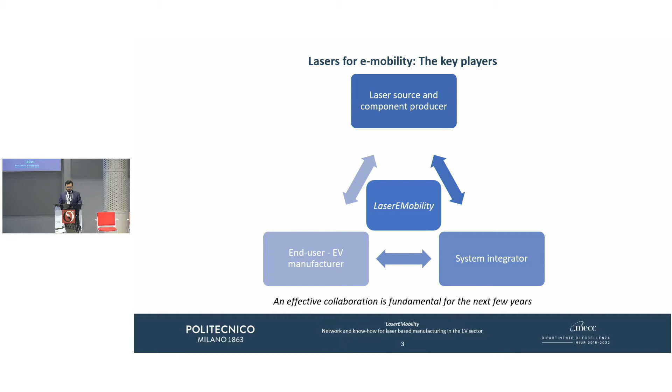In Europe and also the energy storage system, Laser E-Mobility has the humble aim to sit in front of all of these players, be the one that creates the network, facilitates the communication, so that we can have the right way of collaborating. So Laser E-Mobility is the name of our workshop, but I would like to remind us that Laser E-Mobility is a network of universities and companies. We call this a section under AITeM, the Italian Association of Manufacturing.

It was founded by 3 academic and 3 industrial partners. I'm grateful to my colleagues from Bologna, from Munich, and from the industry we have IMA Automation, Atop, Manz and Relays, who represent some significant companies in the e-mobility sector. So the idea is this: we're a group of universities and companies, and we would like to expand, because I've been speaking to some of you here present, and the question was, can we be a part of it, or how did this thing start, and what's happening? So I'm speaking to you as the scientific responsible of Laser E-Mobility, and the idea would be to start collaborating and networking.

You have heard of these things probably so many times. The question is, what do we do, and what is the benefit, or what are the things that we can do within this network? Some very simple proposals and some open questions that we can discuss throughout the workshop, afterwards, and so on.

I have been speaking to people, and one of the questions was regarding the fact that we wanted to share knowledge, and we need data. We need to show people how things work. So one proposal: an atlas of laser mobility applications from the emerging ones - application, solution, quality metrics, measurement outputs. Shall we do this? Do we want to contribute to this? A series of applications given in simple documents so that we can share it with the world.

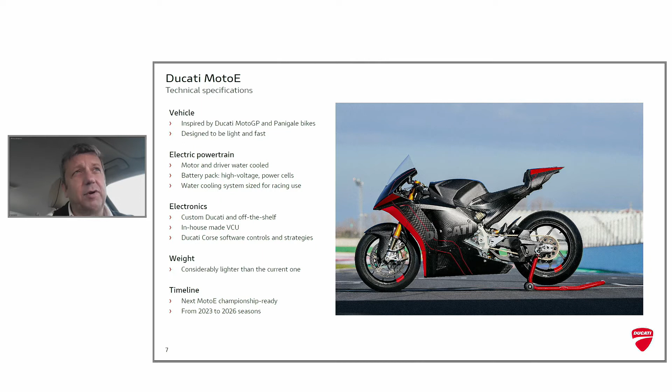The idea is to provide all the teams with this motorcycle for 4 years, starting from 2023, next year.

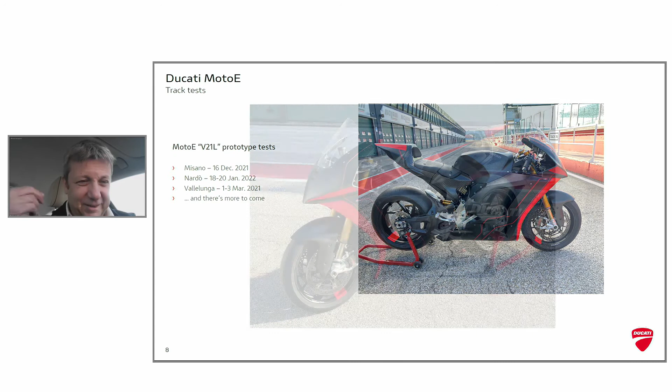Here I took some pictures of the motorcycle that we tested in Misano last year, and also we had a couple of tests at the beginning of this year, and now we are here at the racetrack of Mugello for a test with our test rider Michele Pirro. Okay, this is another picture.

Very quickly also on the MotoE itself, how it is made. As I mentioned, it's a racing motorcycle, made especially of aluminum machined parts or casted parts, but with the idea to reduce as much as possible the weight, because this is also an important issue, especially for electric motorcycles. All battery pack, seat support, and fairings are made of carbon fiber.

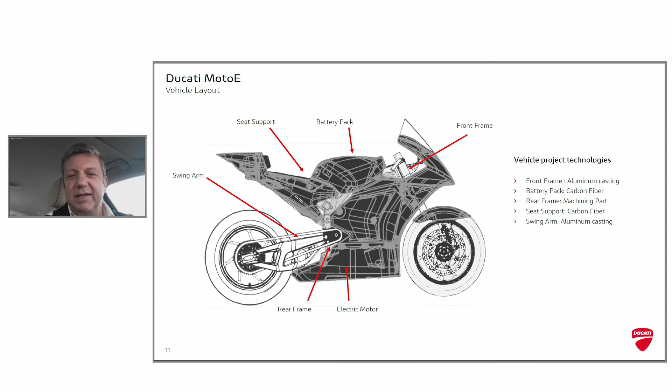This is probably the most interesting point for this workshop, because we struggle not only for the weight of the motorcycle itself with carbon fiber or other lightweight parts, but we had to concentrate also on the performance of the motorcycle. That means we had to gather the best efficiency on both aspects, resistance and cooling of the battery pack.

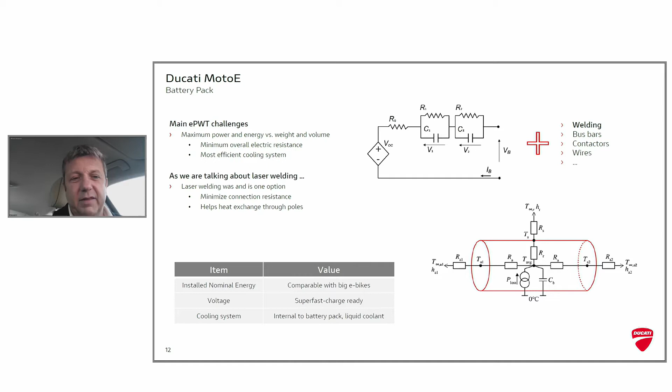I'm showing the electric equivalent model of a cell. But there is not only the internal resistance of the cell that, of course, we have to reduce as much as possible, choosing the best cell, but there are other aspects to keep in mind, especially the resistance of the connection. And here, laser welding can be interesting, but not only for the electric connection that has to be the best possible. Also, the thermal resistance is another point very important for performance vehicles. So we have to cool the cells as much as we can, because when we request a lot of current to the battery pack, they get hot. Also, in my opinion, laser welding can be an interesting solution to help the heat sink from the poles of the battery.

Having said that, let me spend a few words, but especially reason with you about electrification for Ducati, I mean for high-end motorcycles.

Ducati is involved in electrification and invests also in research, and has a very tight collaboration with the University of Bologna. This Moto Student project is only one aspect, but it's an important aspect of this collaboration, and we are quite proud of the job made by the students. They achieved first place during the last Moto Student competition. I have to congratulate them, because they are working very, very well, and they are a source of very interesting ideas. Personally, I like a lot the collaboration we have with them.

Next slide, please. Here you can understand what I mean. If we compare the energy of gasoline, I took an example of 10 kilograms, which could be equivalent to a 13-14 liter tank. You have to add another 150 kilograms of weight to get exactly the same energy from a battery.

That means that if you compare a racing motorcycle powered by an endothermic motor versus an electric one, there is no way, with the technology we have now, to get the same performance in terms of weight. For cars, maybe it's a little different because they have 4 wheels, but for a 2-wheeler vehicle, weight is very, very important. It's the most important parameter of a 2-wheels vehicle.

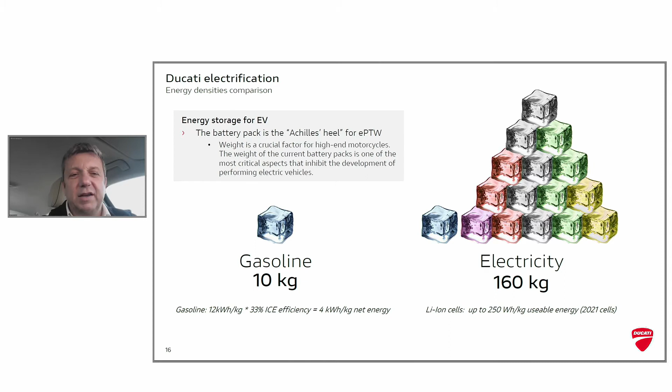Next slide. But Ducati has a vision, and the vision is to be the most desirable brand for power 2-wheeler products. I added also to this statement from Ducati: whether it's with an endothermic motor, thermal motor, or electric vehicle - this is our goal.

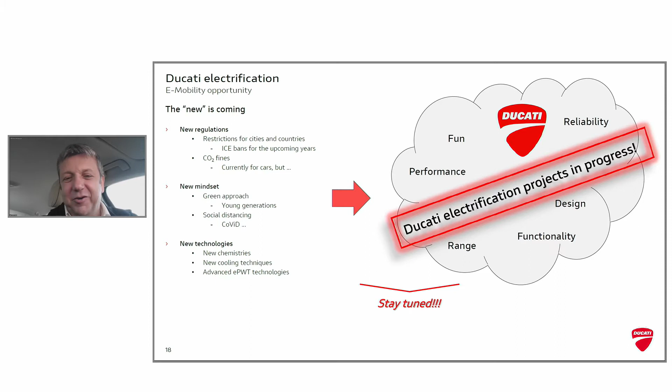So next slide, please. The idea is, and this is also my task, to exploit new technologies, new ideas, new chemistries, new technologies also in welding, power, heat sinking, and so on. And why not take into account that new regulation and new mindsets are going through electrification, to start to think and find something very new that is in the DNA of Ducati, to provide a very interesting electric vehicle. So stay tuned. Next slide, please, and thank you so much.

Thank you very much, Roberto. And thank you. I don't know if you can stay with us for a minute to see if we have any questions. I'm turning to the audience if we have any questions towards Ducati's electrification challenges that we have seen so far. If not - apparently we have a question. Roberto, you can't see, but we have people. Yeah, I see some of them.

So thank you for the very interesting speech. I just wanted to ask if, beyond laser welding, you have other laser-based processes that you're currently employing for the manufacturing of your vehicles, be it either endothermic or electric vehicles. Thank you. You're welcome, it's not easy for me to answer. I guess yes, not in particular for this racing motorcycle, but I heard from colleagues that we are using, for example, laser-cut parts for special parts, but I cannot be so precise, I'm sorry.

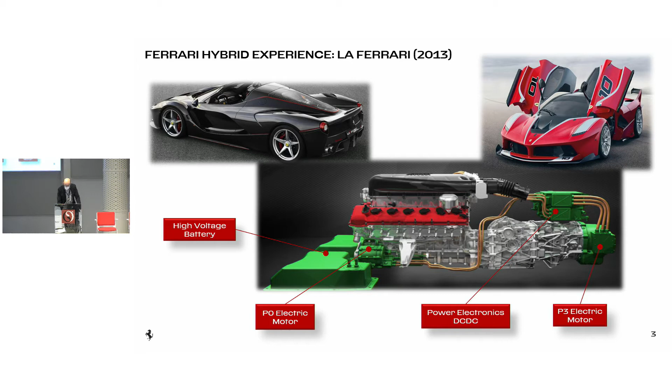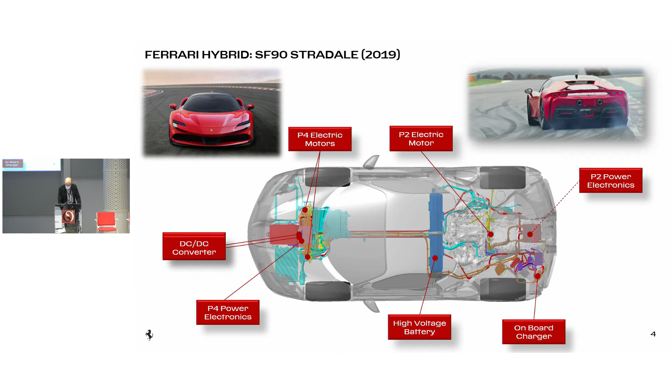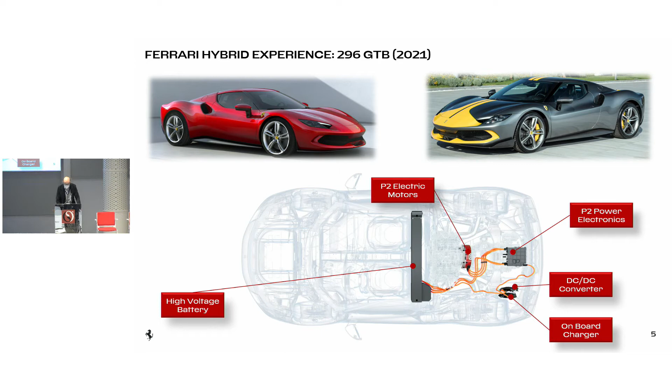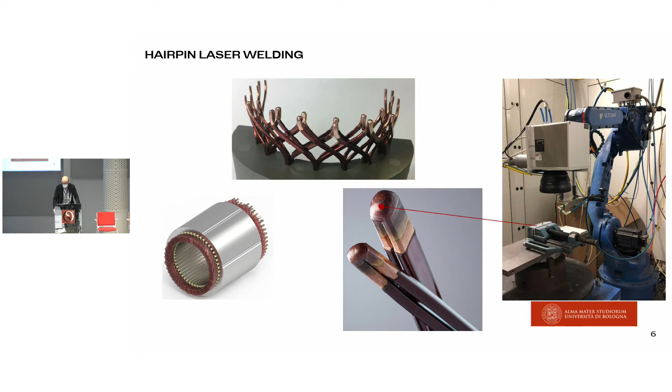To develop all the electric machines and electric motors inside this type of car, Ferrari developed, with the help of Università di Bologna, the technology for welding the hairpin with high reliability of this process. We start from the geometry of the hairpin, giving the right shape, finding out the right laser welding process in terms of parameters and type of laser, to have the correct welding process, but also the right time cycle on the production.

Now I give you an example of what has been developed with the university. We tried different welding patterns during the welding of the hairpin. For example, the wobbling with a single shift, so only one shift with the wobbling. On the other side, we also tried the linear rectangular pattern or the circular one.

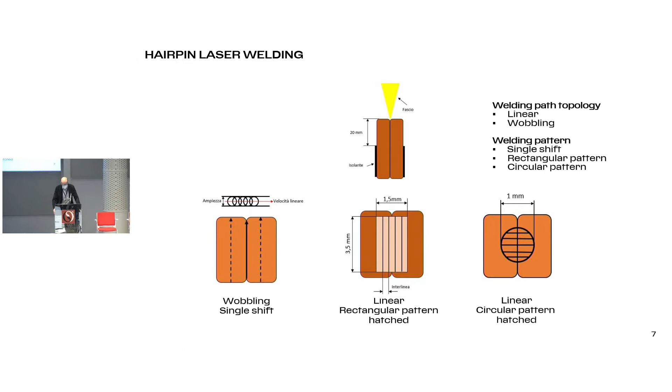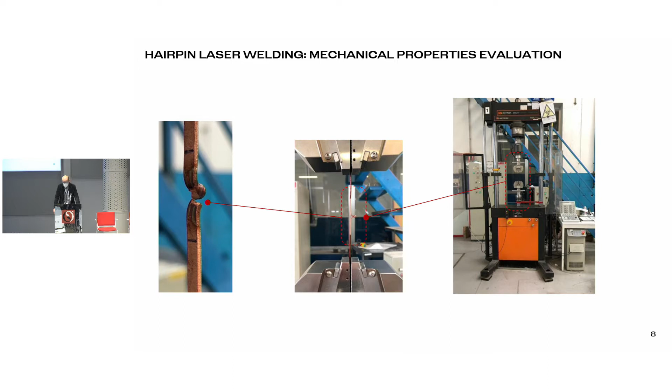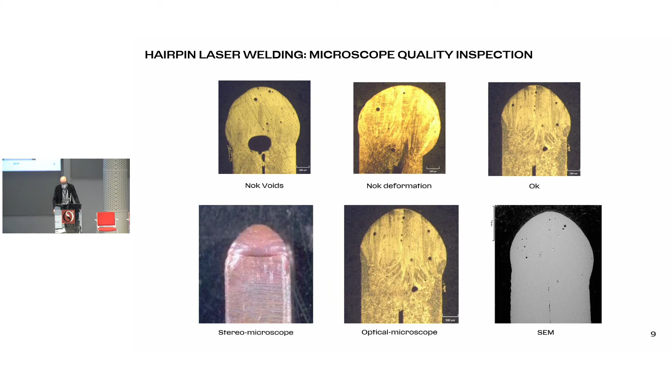This is not the only application of the laser welding inside our car. There is also the battery. This is just an example of the long activity that Ferrari has with the University of Bologna to find out the correct way to weld the tab of the pouch cell of our high voltage battery.

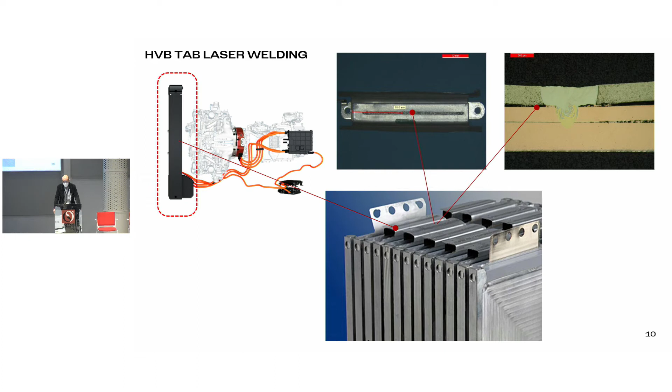From our experience, the laser welding is typically the fastest way to weld the hairpin, to weld the tab of the battery, because the process is highly repeatable, and with other processes typically it's quite difficult. Also, there is no contact between the welding tool and the part to be welded. And in an electric machine, this is really important because typically there is no space for the tool, so the only way is to have a technology where no tool gets in contact.

One of the targets is to reduce the thermal modification of the components that have been welded together, because when we move to the high voltage components, the clearance and the creepage distance is very, very small, and we need to keep the enamel and all the other components necessary for the electrical insulation without any damage.

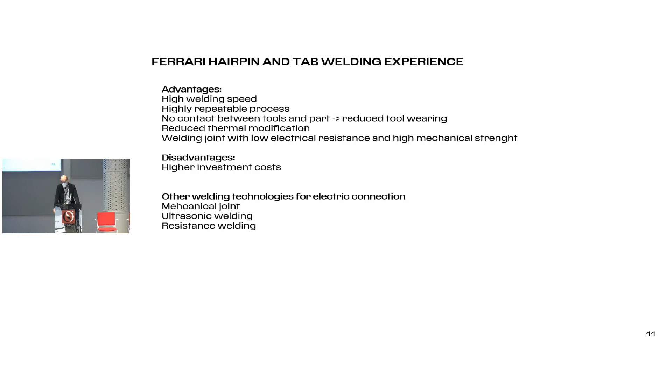We see that Ferrari wants to keep production of critical components in-house. So the electric motor, although it is a new concept and brings new manufacturing techniques, it's in-house. This underlines the fact that this is a crucial aspect of the originality of the vehicle itself. With this small transition, I would like to see if we have any questions from the audience or online. I don't see any questions yet, but let's see. Any questions so far?

Thank you very much for your interesting talk and the insight into Ferrari. You were showing that you're using pouch cells for the build-up of the battery modules. Have you ever thought about using prismatic cells or cylindrical cells?

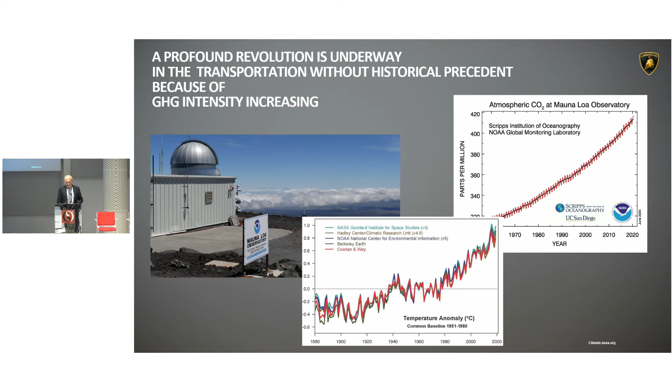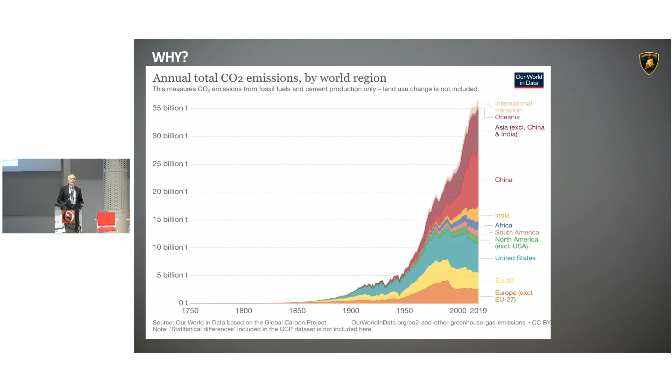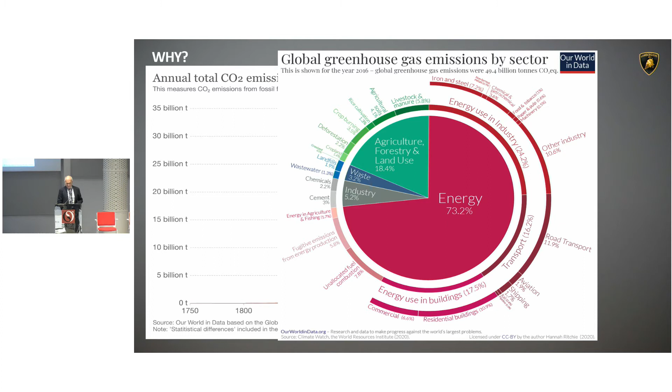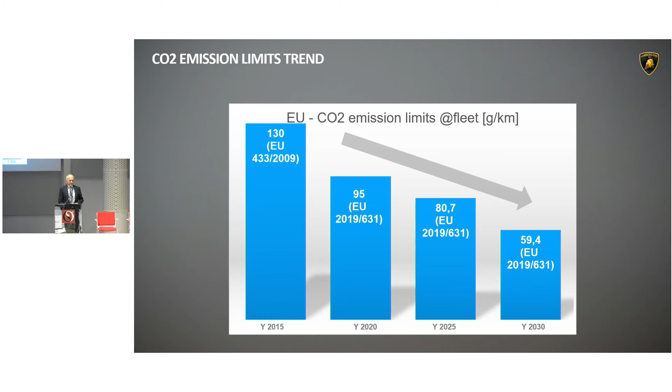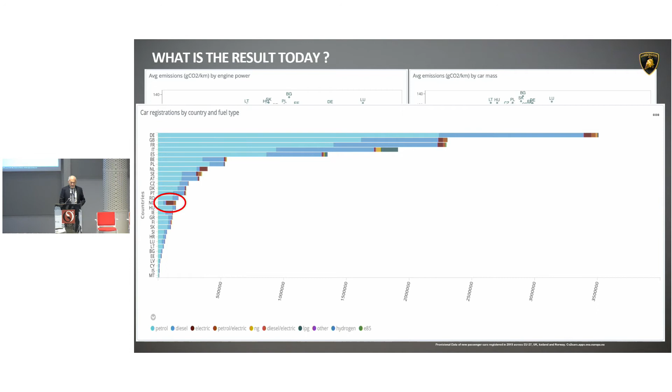But we are looking in this moment, or at least we are seeing only the tailpipe emission. If we look at the mix of electric energy in Norway, we see that it is created with renewable and storable sources. So they have hydropower. 96% of the quantity of electric energy in Norway was produced with hydropower.

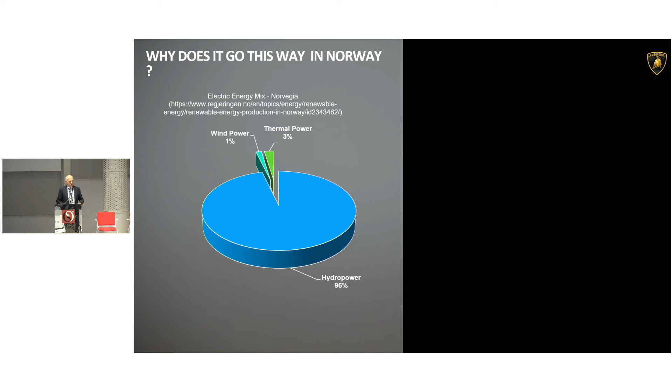If we look also at the mix of whole energy, not only electric, but whole energy produced in Norway, we see that more or less 50% doesn't emit, or is neutral to CO2 in the production. So it seems that the electrification gives a positive contribution to reduce CO2, because the electricity created is, let's say, neutral to CO2.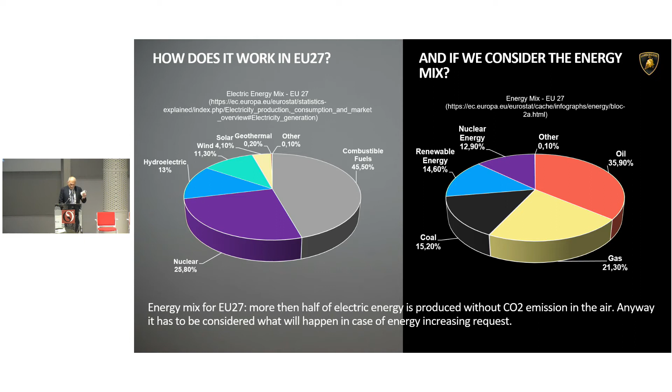Okay, this is something to consider. So legislation and environment considerations, with a critical approach to the resources of electrification, are anyway saying that we have to go to electrify the vehicle.

But what does it mean to electrify a vehicle? We started today, we spoke a lot about battery, so we start from the core, and the core is the battery. Here you see a battery of 55 kilowatt hours, medium energy, let's say - if I remember, it is the Zoe battery. With this battery you can drive 250 on the test cycle, maybe 300 kilometers, and the energy package weighs 325 kilo.

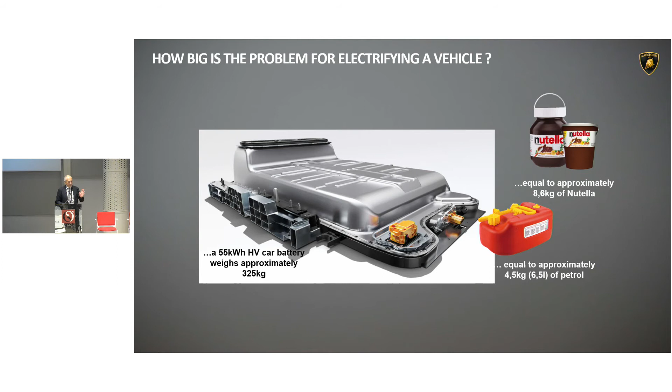325 kilo with 55 kilowatt hours is more or less equivalent to 4.5 kilo of petrol - the same energy in both these packages, or boxes. Just to give some sensitivity to everybody, it means there is energy equivalent to 8.6 kilo of Nutella, the same quantity of energy, but 325 kilo. Just a historical information: the famous Fiat 500 was 475 kilo.

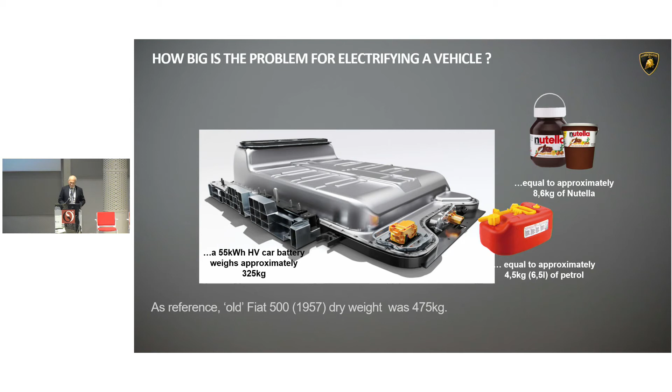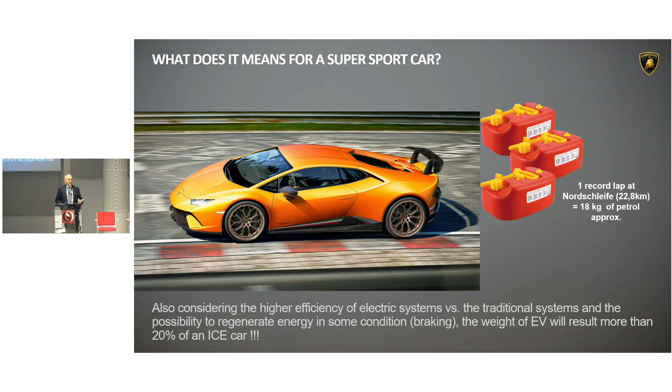So if we're looking at a super sport car, and we want to run a record lap at the Nordschleife, which is a reference for all super sport cars, we need 18 kilo of petrol, more or less 3 times what we saw before. So you can imagine if we have to transform this into electric energy stored on the car, it means more or less an increase of weight of the car of 20%. 20%, also thinking about recuperation, about efficiency, and of course all electrified devices are more efficient than electromechanical ones. But anyway, weight is becoming the challenge for the next generation of cars, and also today it is anyway a challenge.

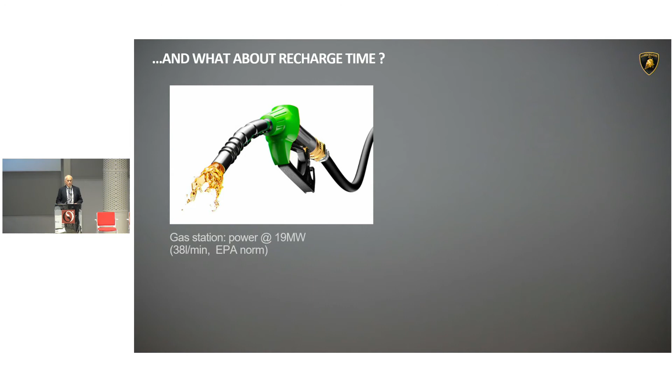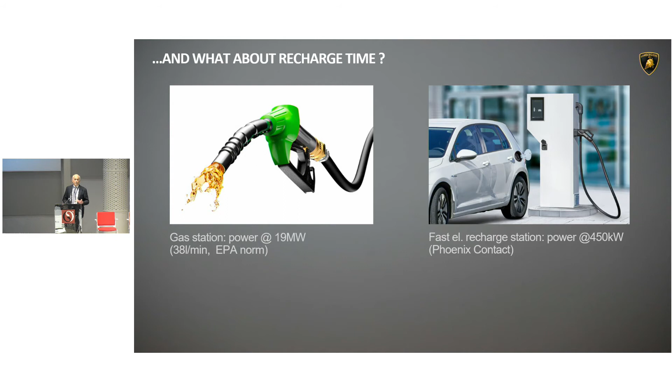There is also a short overview about another topic for all cars, but I think also for the super sport car it is a topic because it is correlated to the critical way to recharge. A gas station, a petrol station, has a power installed of more or less around 20 megawatts, when a fast electric rechargeable station has more or less 450 kilowatts. So the dimension of the problem for e-mobility in general, but in particular for a car that needs a lot of energy and a lot of power, you can imagine how big it is today.

The weight for the super sport car, it is the real challenge. To have and to be ready for the future, it is clear that we have to rethink how we are distributing the weight, and we have to take into account that anyway the electrification gives some flexibility, or more flexibility respect to the traditional powertrain, because there is a connection of wiring in some cases. So we can put some actuators, the electric motor, we can put the battery more or less where we want.

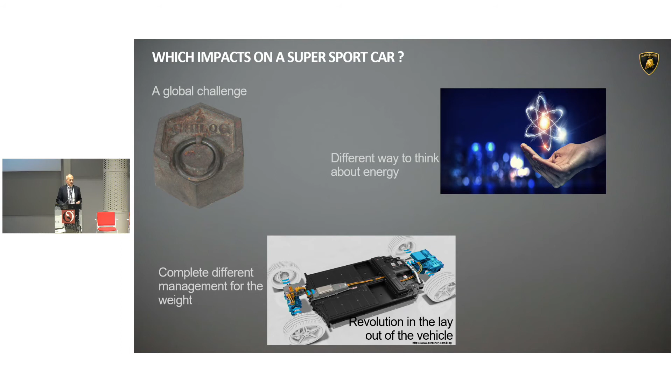But also, it is necessary also to think how to manage the energy in the car. Manage means how to recharge, how to discharge, and how to keep on board the energy.

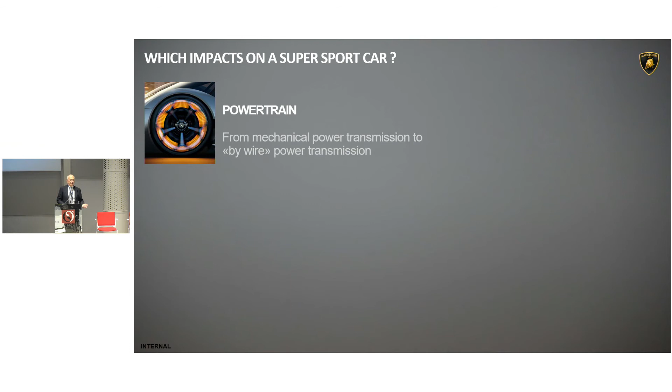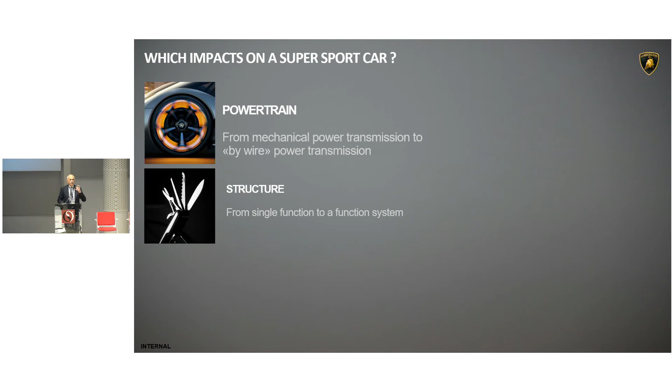We think that the focus in the next period will be again on powertrain, because it was before, but will be again with different powertrains that we can imagine by wire instead of pure mechanic transmission. And the system itself, the car itself, the vehicle itself, cannot be anymore the assembly of different functions that we connect together, but has to be designed from the beginning, thinking about a function system. So more integration and more efficiency in how we are designing the cars.

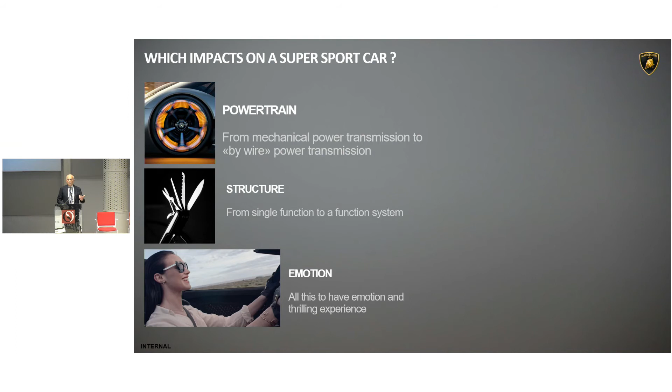Everything in terms of course, for what is concerning the super sport car, because we have to deliver emotion to the driver, and so the target is to be able to keep emotion at a high level. And so we are passing from a situation where today we have energy that it is abundant. If we think 100 liters of petrol, it is light because there is a big quantity of energy, and absolutely inefficient because we know that the efficiency is very low.

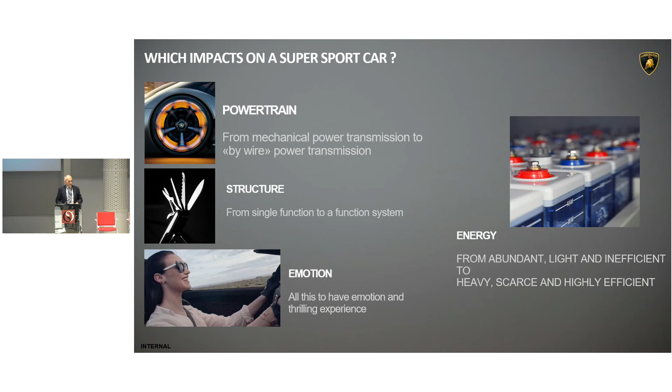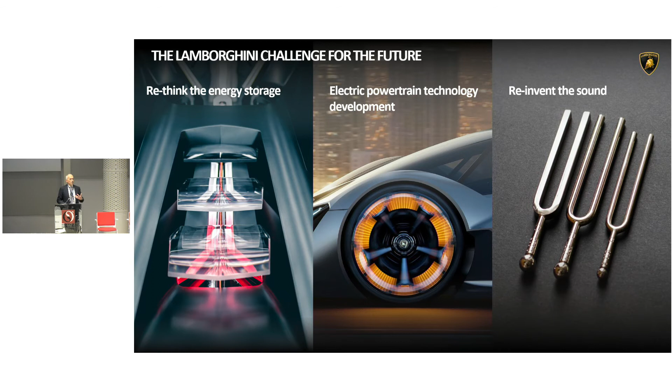The next step, it is having heavy energy, the battery. We have a scarce energy because there is no big quantity of energy, and will be highly efficient. And to do that, we think that we have 3 pillars in this moment. The energy storage has to be rethink. We saw some limit. We know that we have to go beyond the limit and to find a different way. Surely we have to define different technology for the powertrain, and we need sound, because otherwise we are not able to transfer all the emotion that today we are able to give to our driver or customer.

So we think that we need a more collaborative approach. We need universities, we need research centers, we need more than in the past open innovation, and we need inspiration for and from the new generation to understand how we can have emotion and how we can, of course, be sustainable.

To do that, Lamborghini announced last year Direzione Cor Tauri, so Cor Tauri direction, let's say it is a label of all the activities that we will do, not only on the product, but in the company. And there will be a transition that we are moving from today, where we have all the model line with only ICE engine, apart some mild hybrid, let's say, and we want to reach in the next 2 years a complete electrification. That means starting with hybridization for the model line.

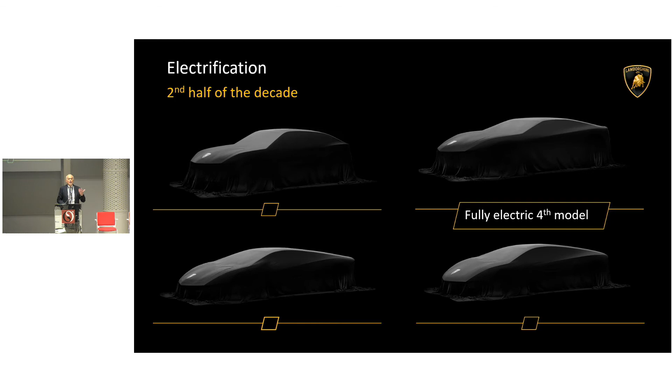But we know that in the second half of these 10 years, we will have the first fully electrified vehicle in our model line. So we will add something that will be completely electrified. The target is to reduce our impact in CO2, in fleet consideration of course, of 50%.

It is clear that today we want to pass from a neutral single approach. For instance, we have a building that is completely neutral today, but we wanted to pass to a company that is completely neutral. And so it means that anyway it is necessary to spend a lot of money, and we announced 1.5 billion euro for a transition of the whole company. And it is clear that it is necessary to have a holistic approach, not only for the product, not only for the building, but for the complete activity that we are part of every day.

This is the end of my presentation, and thanks a lot.

Thank you very much for a very comprehensive outlook on energy. I appreciate especially the fact that we need to always remember where energy comes from, because we tend to forget that there is also an environmental impact of how we get it out. I'm once again turning to the audience and reminding everybody that if there are questions online, we have a lag, so please bear with us. But we have a question in the audience.

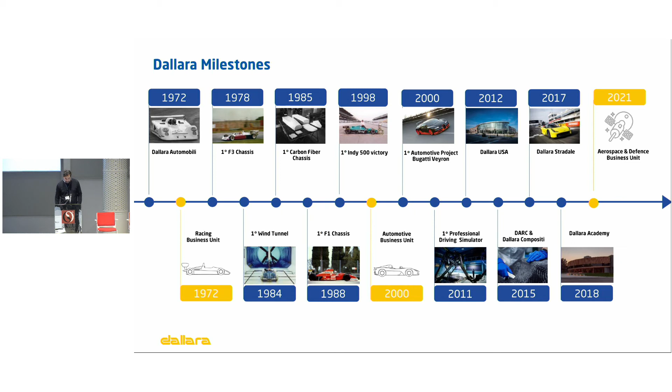These are the 3 areas where we are active. Racing is our history, we work on several championships. In the past I had to tell that we were everywhere except Formula 1 - I don't want to say proud, because it's the opposite. Now, although the results are not the best in class, we are also in F1 with Team Haas, so we are basically in all the categories.

In automotive, we are basically supplying services and competencies to big OEMs, like the colleagues here today, on parts where we are competent, not on the complete car. In aerospace and defense, it's quite a young journey. It started during the COVID pandemic, and we started learning how to design for this world and give our support. This started with some design of primary structures for helicopters and airplanes.

How do we work? We work through a platform of projects, and we try to develop our expertise. Our expertise is in lightweight design. That is my biggest amount of job, lightweight design through technologies and through materials. I heard some discussion regarding lightweight and regarding materials. Yeah, this is one of our main tasks.

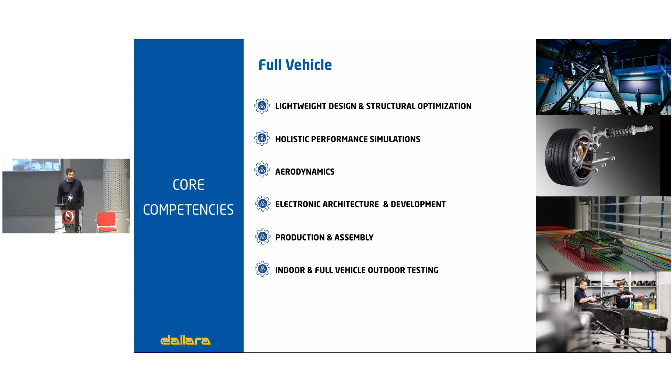And where, for example, lasers are coming and having effects, we use performance simulations, aerodynamic simulation, and hardware. We make something electronic, especially to be in the condition to discuss technically with the technology developer. Obviously we are not technology developers, we are users. And then we have, let's say, everything to prototype parts.

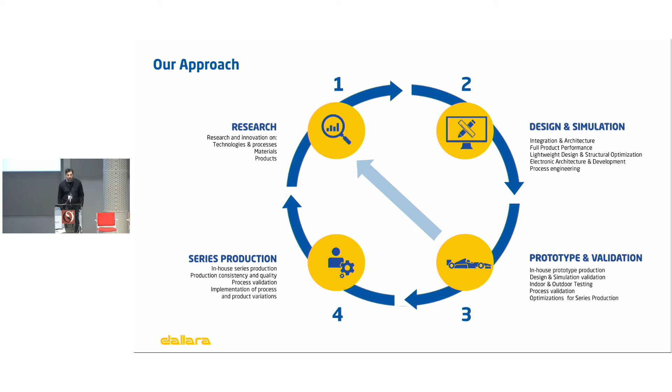How do we work every day? We work using a sort of circle. We try to push a lot on this, we push a lot on research. We try to be at least at the leading edge in designing and simulating, and we use the prototype to make a sort of real validation of our job. So the hardware parts become a sort of validation of our 3D models, and it's a very relevant part of our job to make validation of what we are doing.

Our projects, as I told you, racing is where we come from, where we are, and probably where we will be until racing is alive. During these years we faced several architectures, several powertrains, the challenges of Formula One, always pushing at the limit of performance and weight. Formula 2, for example, is an entry level to prepare the drivers for Formula 1.

Formula 3 was one of the most challenging championships. We went through 3 generations of Formula E, so we approached, in another perspective, not in mobility but more in motorsport, the electrification of cars, with huge problems related to weight.

So imagine, in our job, in our world, performance and feeling of performance is the real value we are targeting. Obviously, when the car passes from 570 kilograms of a Formula 3 to 1,000 kilograms on Formula E, it's a completely different feeling, a completely different level of performance.

Then we have IndyCar, Super Formula, the new LMP cars, where hybrid solutions are also coming up in the world of motorsport. Then we are, okay, a small OEM for our car.

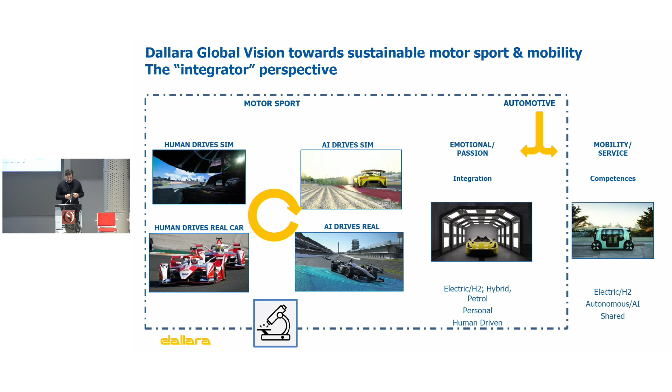We are also very proud to say that, as discussed by my colleagues of Ducati, Lamborghini and Ferrari, we try to push a lot on the future, because all this change of technology, batteries, increased efficiency, needs to be pushed with education. For this reason, we are very proud to work from the university point of view with several activities on motorsport. For example, we have Formula SAE, where we push the use of different powertrains to understand new sensors, new technology, and so on. I think this will be the future of Dallara, mainly staying there, keeping an eye on all the technology, and trying to integrate with the maximum possible view on virtual development.

I know this presentation is much less relevant from a technical point of view, but this is the perspective from an integrator. So thank you very much for your time, and it's a pleasure.